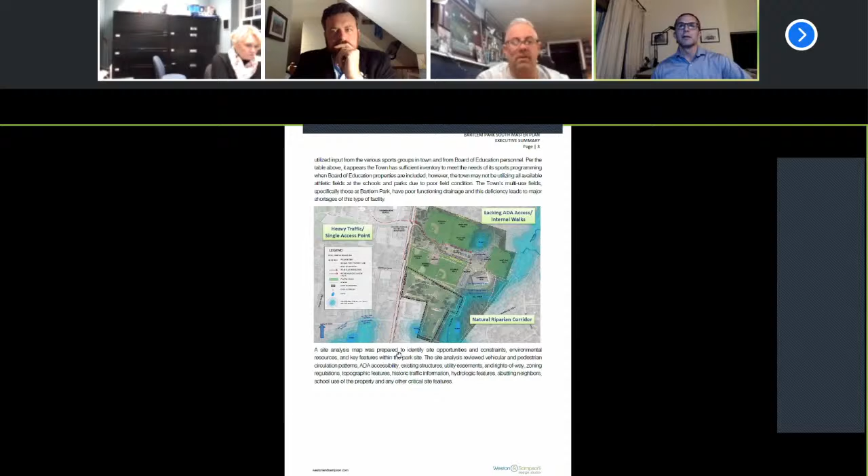Then looking directly at the site in a big picture, some of the things that influence the design: you have heavy traffic along Route 10, everybody knows about that, Cheshire High School right across the street, shared parking for Cheshire High School. There's a natural riparian corridor, or Mill River, along the east side of the property. Also surrounding neighborhoods, residential areas on really 270 degrees of the park, and some also on the west side of Route 10. And your ADA access, a big component of parks systems these days and municipal facilities, is making sure that you make it accessible for all, especially when we start introducing more opportunity for senior citizens, elderly, people that may have physical challenges to get around the site just like everyone else could.

So we started really engaging the public. The kickoff was the Cheshire Fall Festival in 2019. We set up a pop-up tent, had great attendance. You can see John there in action in the top right, speaking with a bunch of people, reviewing some of the potentials for the site.

We ran, this was a postcard we developed for that meeting, and we tried to collect as much data as we possibly can through a SurveyMonkey, which was available at that time. It was published online, sent out to multiple user groups. And this word cloud was a fun way to see what were the major key words coming out of that SurveyMonkey. You could see splash pad and trails and nature.

Some sports were in there, so everyone had that nature-based approach towards what they'd like to see. It was actually quite surprising. I thought I was going to get a huge contingency of athletic programs really speaking out for additional fields, but through personal interviews with stakeholders and collecting the data from 1,200 respondents from the town, it was important, but...

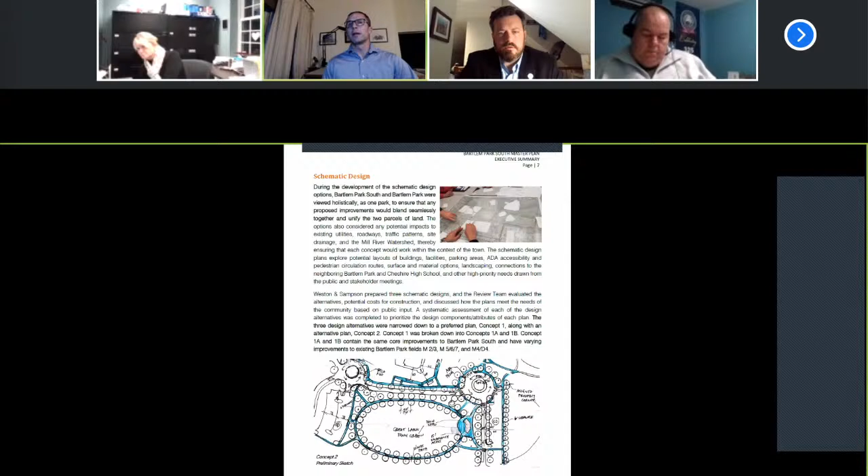One of the concepts, this was an early-on sketch, was the great lawn and town green right up front along Route 10. Have it a combined space and really have it front and center. We're proud to have this town green.

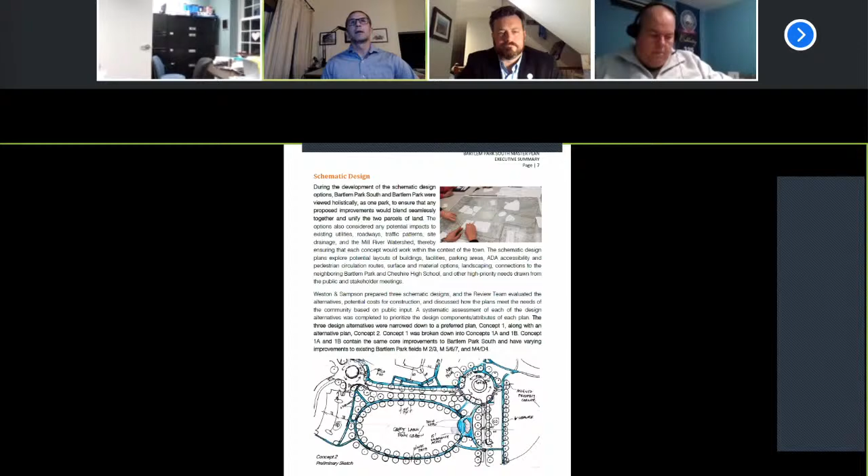After going through some more sketches and options, we didn't only put the pen to paper and look at trace, we also looked at costs of all these different things, which is very important at that very preliminary stage. We didn't want to design the Taj Mahal and have everyone excited about it and not be able to afford it.

So concept one is about core improvements. These are improvements to the Bartlem Park South parcel, which was the main focus of this master plan study. We took liberties to make sure it tied into the rest of the park and made sense.

Concept one, core improvements, really includes a smaller town green front and center along Route 10, and a larger outdoor great lawn that allows for passive recreation, unprogrammed space for everyday citizens to come, not organized sports.

You can have an event stage here that hosts a summer concert series, yoga classes, performing arts, really any outdoor class or outdoor venue, which increases the income potential for Parks and Rec as well.

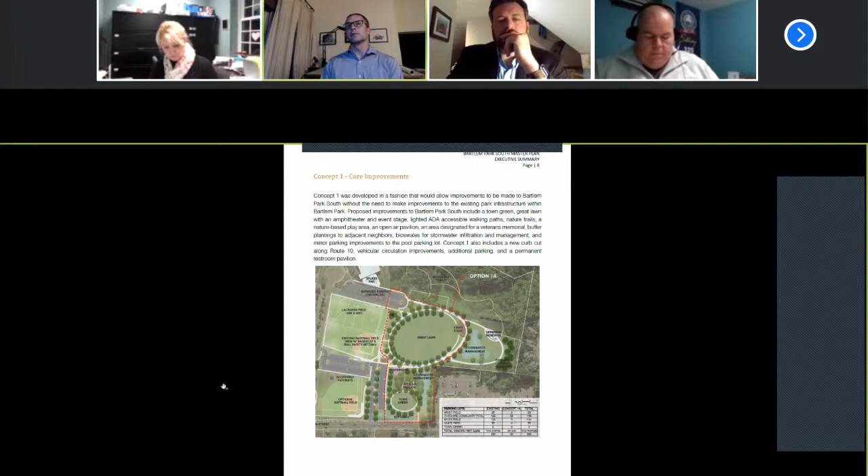You can see how close they are, so we provided some evergreen screening. The location of the event stage is also outward facing towards Route 10, so sound and noise was a consideration when we located this, as well as sun and topography, utilizing the existing grades out here to make everything work.

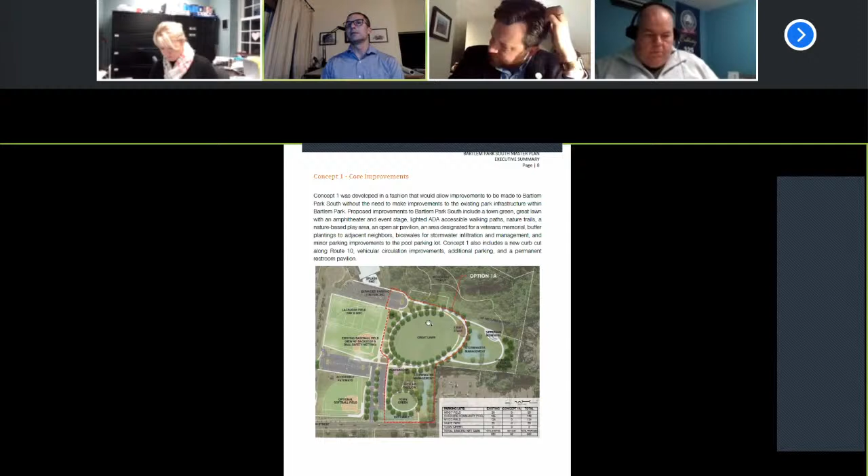This smaller town green—

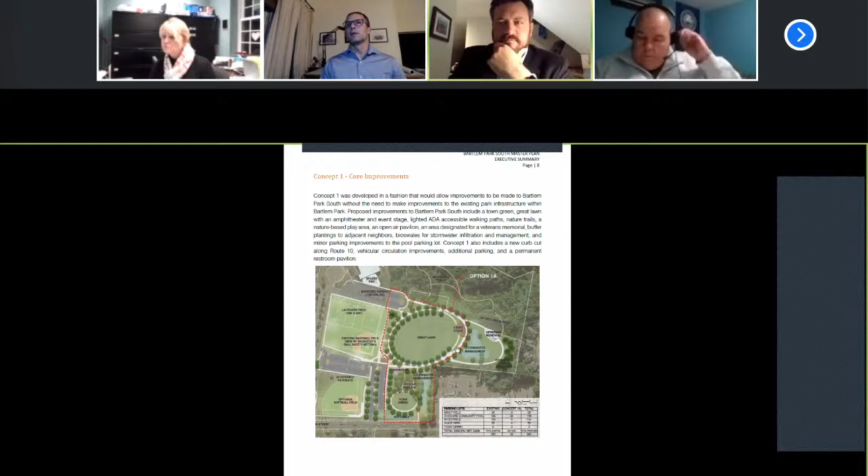Hey Ryan—just real quick, sorry, it's Sean. Would you be able to put on, I think one of your next slides, the larger map? Is it possible to see it a little easier for folks? Sure, let me zoom in. Yeah, let me do that. Might be easier because folks are watching on the TV. I'll just do these one by one since they're full slides. There we go. All right, perfect, thank you. Is that a little better? Yeah, that's good, thank you.

So here, the town green can hold a variety of different events. You could rent it out for parties, have tree lighting in here, and it would be graded out completely level, so if the weather was cooperative, you could have winter ice skating here as well.

There's a small playground area for a nature-based play program. The other important thing on this plan is all the white highlighted pathways, which are accessible pathways to all of your recreational facilities, including backstops, player bench areas, spectator viewing areas, etc.

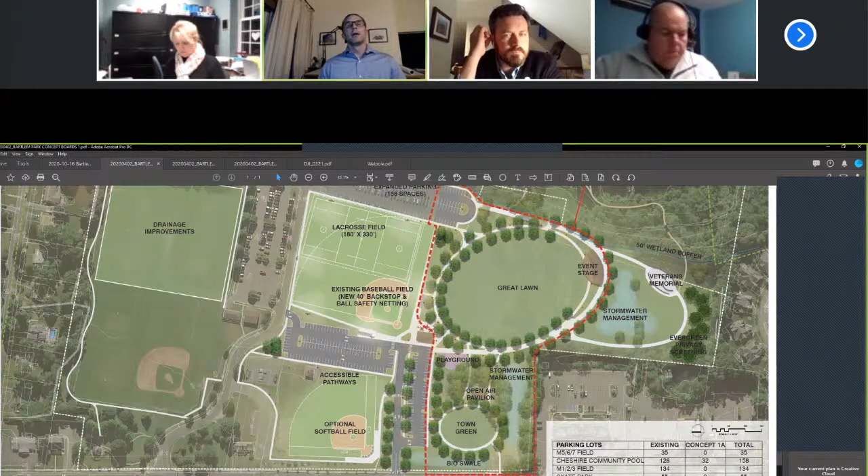In this particular concept 1A, zooming out to the bigger picture, a couple other key factors here were having this curb cut along Route 10, a secondary means of egress, as well as additional parking within the heart of the park.

We looked at whether to put parking out here, or expand parking in different areas. Really, putting parking in areas where they'll serve the new development, as well as divide up parking for the existing development—there's a small existing lot here and another smaller lot over here—so really the circulation frees up traffic a little bit and provides more parking.

Concept 1A: these three fields here, M2, M3, M4, and 5, 6, 7. M2, M3, and 5, 6, 7 are poor draining, which is a challenge for cancellations, for hosting practices, for early spring practices. It's really the worst time for scheduling, so we identified the need for drainage improvements here, as well as here.

There also seemed to be an appetite for fitting a multi-purpose synthetic turf field in town. Based on the square footage, we could fit a full-size football field, shown in back, with two overlapping lacrosse fields as they're striped today, in that area. It's lighted, and if we were to expand this use out here, it's not really expanding the use, but expanding the capability of use and the amount it could be used.

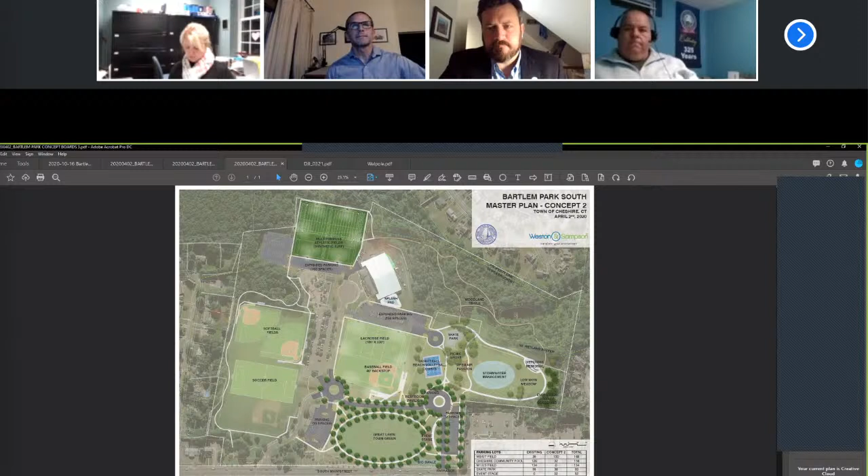Okay, excellent. Well, thank you very much, and thank you for these plans. I know there's a lot of different opportunities, and I like the idea of the town green, the great lawn, and the event stage. So I'll be interested to see how this plays out.

Thank you. May I ask a question? Yes, Mr. Slocum, of course. Thank you, Chairman.

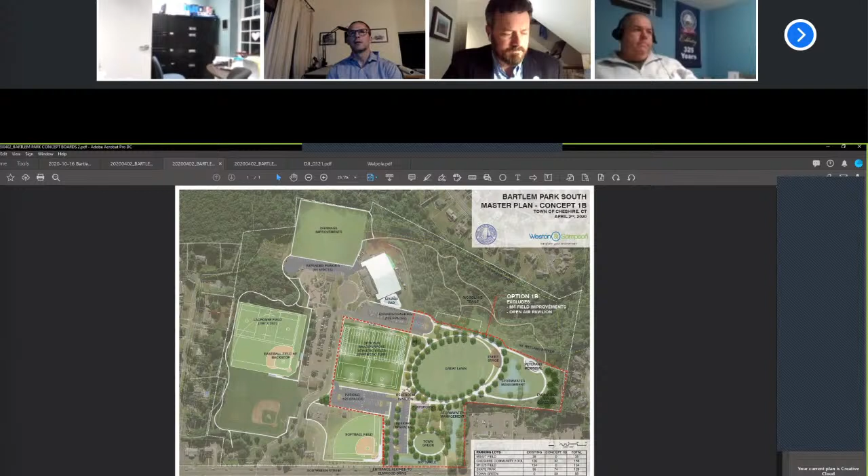I just would like to express my appreciation for the front lawn being proposed as the town green. I think that's an excellent idea. Most of us have played in our backyards, and we don't necessarily have softball fields right on Route 10. I'm not adverse to that, but I do like the concept of greening up the park. I think that's an excellent idea, and that may factor into cost. I can't judge the scale of it, but it appears to be larger than a football field.

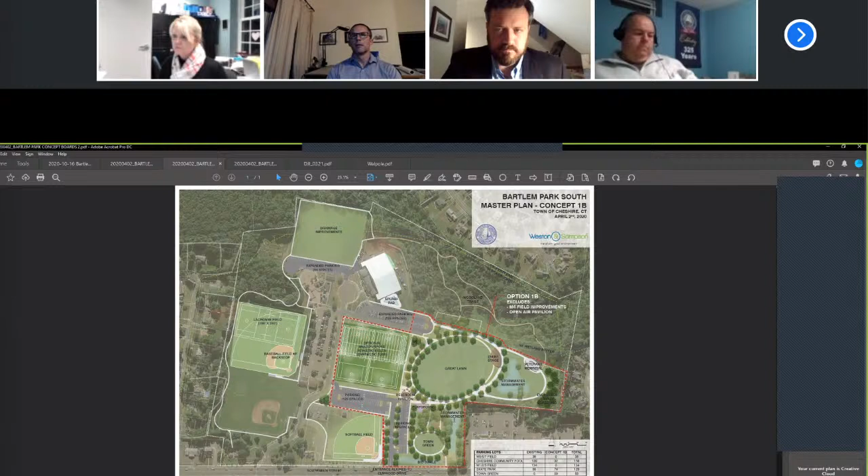How much space is that actually consuming of the acreage? The one that's say right on Route 10, the oval on Route 10. Yeah, which I prefer just visually. I like the whole idea of it. It's a grassy green area that you drive by, and it looks attractive.

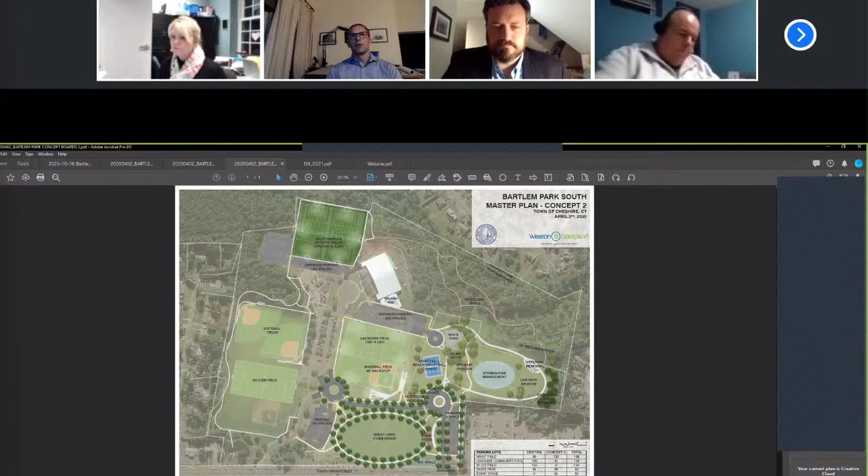Let's do a little fun exercise here. This lacrosse field can fit within this rectangle, and so that's about... Hey, can I interrupt you for a minute? I don't know if everyone else can see what you're pointing to. I can't see your cursor referencing things, so it's making it hard, at least for me, to follow where you are. Is there any way you can enlarge that?

Enlarge my pointer? Yeah, because you're referencing things that I just can't see. I don't know if anyone else is having that issue. You say over here, but I don't see what you're pointing to. Can you see the hand better? Yeah, try the hand. Can you see the hand? Yeah, barely, that looks better to me. Okay, thank you. I don't know how to change it from that. That's the best I could do right now, and I zoomed in a bit.

So if you look at the size of the lacrosse field up here, that fits within this area here. It'll be a tight pinch on the corners. Generally speaking, a full-size soccer, lacrosse, field hockey, or football field is a little under 100,000 square feet. So it's a sizable chunk of land.

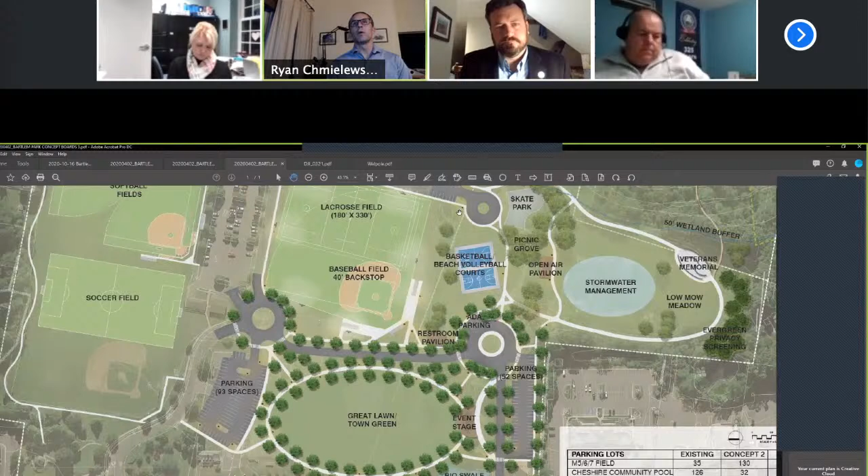Yes. Okay, I think one thing that at least a small number of people in town have appreciated is what Park and Public Works had done, placing some fields and footpaths in that new area, and they are used. Has this more or less kept about the same amount of pathways in that area, or has it even enhanced them some? I think it has enhanced them to some degree. You could actually see some of them, they're hard to see, but there's white dashed lines in the backdrop. So I would say reconfigured, added. In this particular area, it's probably equal.

But Tim, if I could just jump in there, that was something that was a source of a lot of conversation and feedback we heard from the public. Just to your point, people really appreciated the ability to walk there. One thing we heard a lot was an alternative, in a way, to our wonderful hike and bike path right in the middle of town. There are some walkers who feel it'd be nice to have a non-bicycle space, more for walking, where you don't have to worry as much about folks riding their bike at a faster speed.

We've heard that feedback from folks, and it was important to find a way to loop around all of Bartlem, not only to attach the Chapman parcel to the overall park, but as an option for whatever that is, 1.6 or 2 mile loop around the park, if possible. That may be at a later phase as we talk about the master plan. But that was the feedback we heard a lot, that people are looking for a place to walk in a more park-like setting, without concern about high-speed cyclists coming through. So just echoing what you said.

And then my final question is this: with respect to creating a town green, so to speak, I just don't recall what you said in all your planning. Did you give up any fields? Was there a sacrificial field that's not there?

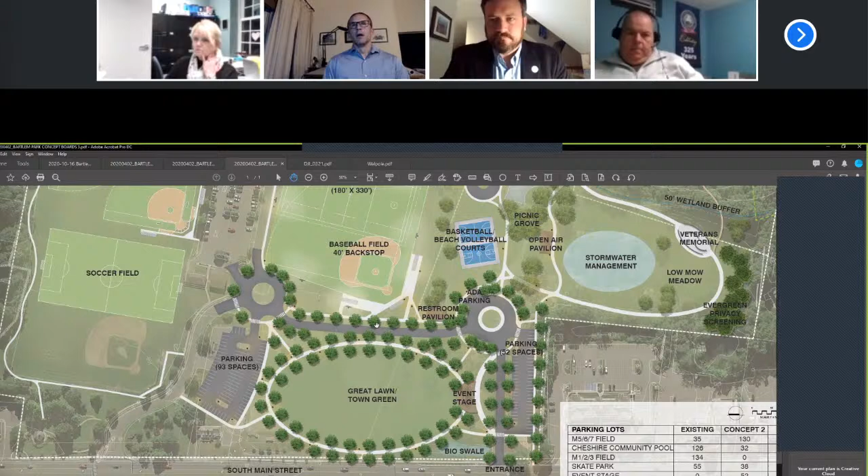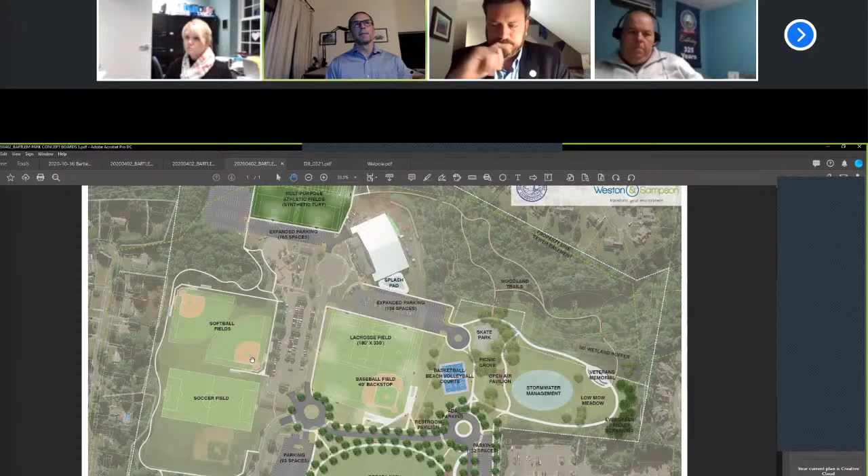In this plan, we have, I would say, sacrificed a rectangle field by displacing the softball fields over here. However, that's one of the reasons why the synthetic turf came into play, because you could run that multi-purpose, as long as you're allowed to by town code, how late you could light it, and by people's ability to play after school and on the weekends.

Okay, thank you. Right. Sometimes of the year you can sort of double your usage of a field with lights, because you're playing after 5:30, until you can't play.

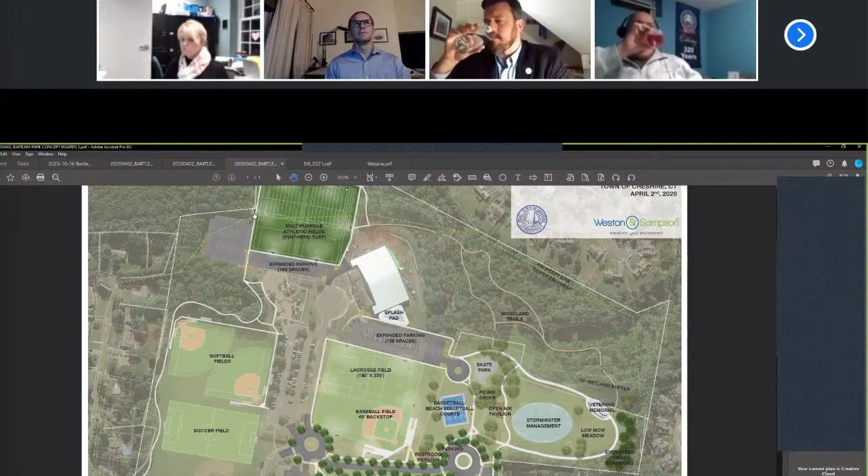I can't see everybody, so I thought I saw Miss Nichols. Yeah, I do have a question. First of all, John, I communicated this to you before, and I will say it publicly: I'm very impressed with the fact that you've listened to all the community input and really tried to incorporate the ideas in any one of these plans that you have proposed.

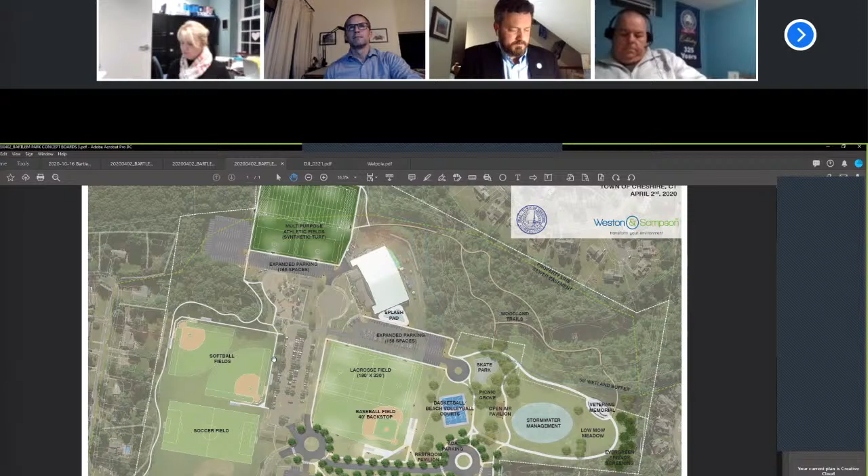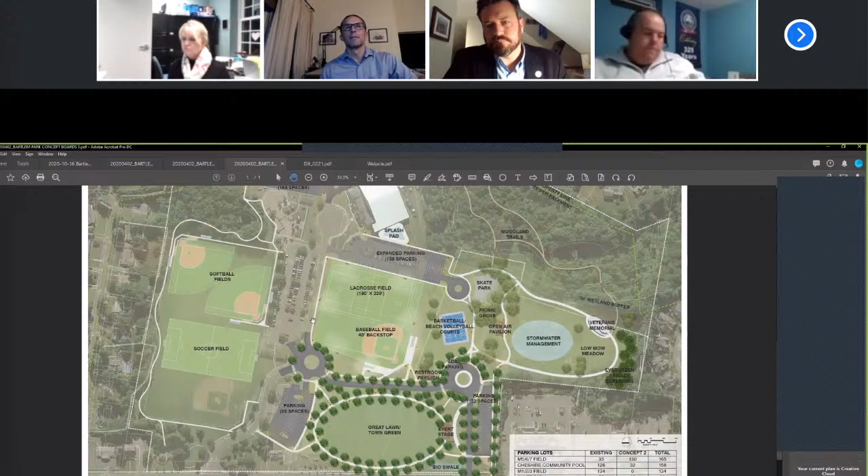There's a couple of questions that I have in this particular plan. I feel like there seems to be an awful lot of driveway space to go around these little turnaround places, and I'm wondering if that is taking away parking spaces, which I think are always at a premium in any kind of a plan like this. So does that eliminate parking places and provide much more impervious surface to this park?

It's hard to tell the proportion when you're just looking at the picture. It seems, Ryan, like you want to go through that chart? Sure. On this one, any parking space that we lost in this area by having the circulation through, we've gained by reconfiguring here. So we've added a few spaces here. Here we've added 52.

So if you look at this concept too, what's existing, let's just go from the top down to make it easy to follow. Existing for M567, that's all the way up here, we have 35 spaces right now. We're showing concept 2 has 130 spaces. Cheshire Community Pool parking here, existing is 126. We're adding 32.

The M123 field, that's this parking lot here. We have no change. And then the skate park, that's this parking area. We had 55 existing, we're adding 38, for a total of 93.

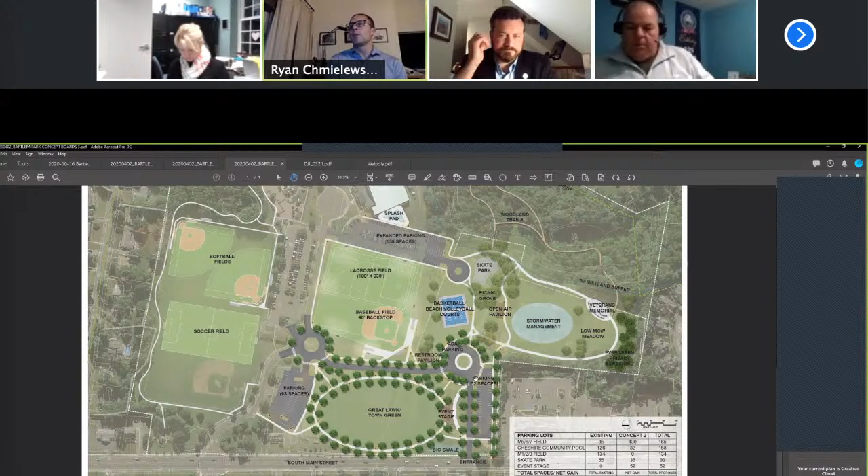So that does become a questionable use, not necessarily a potential place where we could build something else. It's going to have to be reserved entirely. And what you see a lot, oftentimes that is overlooked.

It's one of those unfortunate things, you have to dedicate an area for stormwater. But this area here is already so natural, it's already a low point. We could really make it, if you do the right planting mix in there, look like a meadow versus being an engineered stormwater management system.

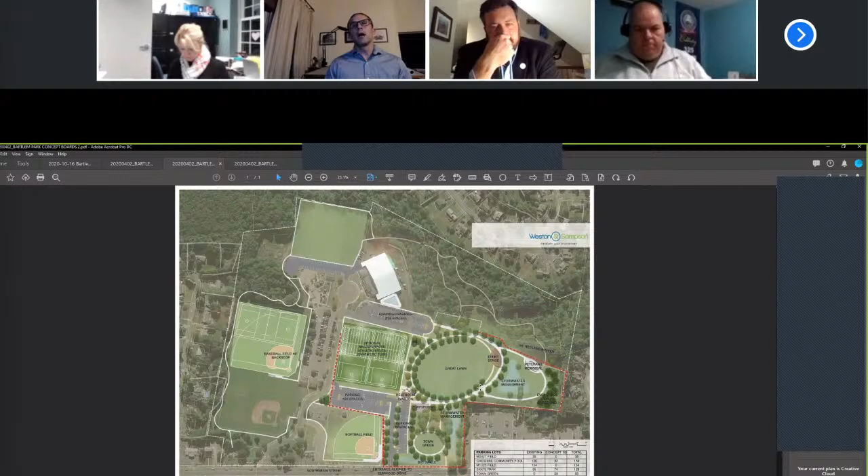Okay, and I don't remember the first two, where we managed all the stormwater. This seems like this would manage more water than the first two, but I can't remember where you had those. Actually, it probably manages the same, if not more. We've just divided up. We've divided and conquered.

Divide and conquer is probably a more desirable approach in that you have more chance for water infiltration and better water quality, versus just having everything hurry to one spot where you're raising up and then slowly settling. Here, if you design it correctly, you do have potentially better stormwater quality.

And those are going to drain the property so that we don't have the water problems on the fields, if it's laid out properly. Correct. Those are really for the increase in impervious surface and the sidewalks. It's not, the parking lots are the biggest increase in impervious area, and additional roads. The walkways have some impact at the event stage, but

the field drainage itself is a little different of an animal, it's its own issue. These fields here are more about soil compaction and subsurface conditions versus water running onto the fields causing a problem, as well as based on the soil types. In soil conditions below, they really should be either graded with a higher percentage slope, but then that becomes less desirable for athletic field play. So it's a give and take no matter what.

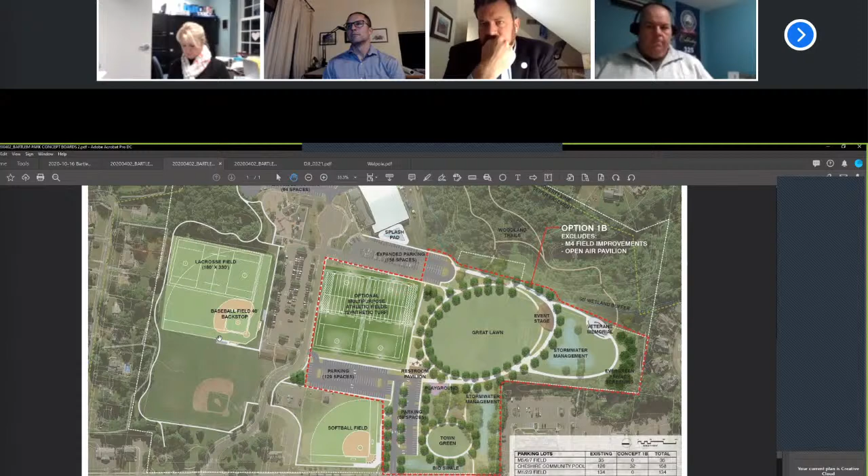And the only thing that concerns me slightly about that is that we are in a school modernization mode, and we are right now looking at the uses of the properties where the schools are. Should we need to use some of those fields to expand any parts of the buildings, is there flexibility in this, in any of the plans we're considering here, to be able to include those fields that we would otherwise have moved from Bartlem Park to go to, say, Highland School?

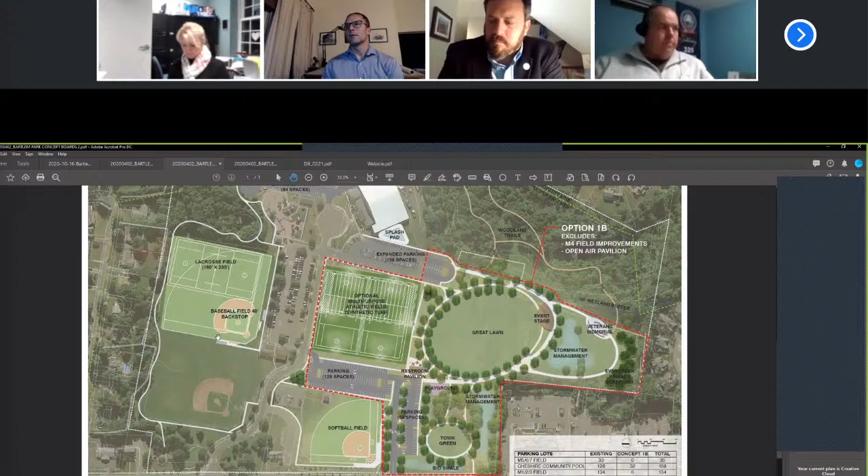Supposing we had to make an addition on Highland School and we had to give up those fields at Highland School, is there enough other place to have fields in town? Because these projects are going to be somewhat concurrent on a time frame, and I wouldn't want to accept this proposal based on something that might change when the school modernization proposal came along. On the other hand, we can't wait for the completion of every project, but we need to be flexible, I guess is where I'm at.

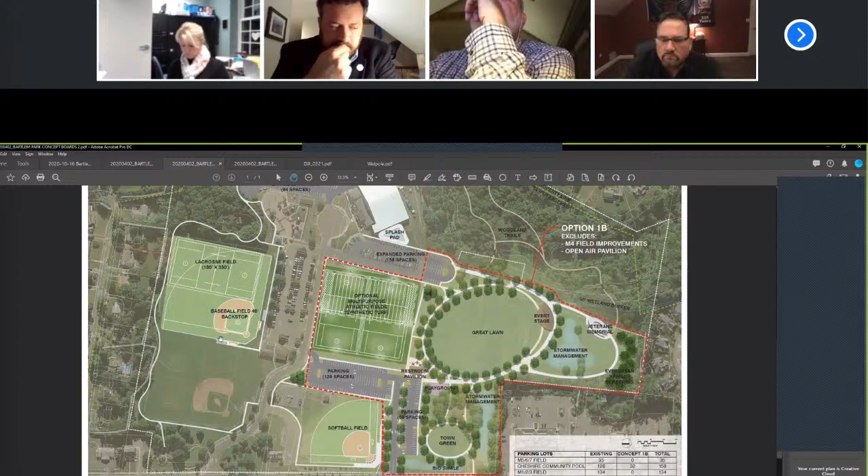So I'm going through a town-wide athletic field master plan in Greenwich right now, and they have a lot of fields, but they also have some issues going on at their schools with the need for remediation of some of the sports fields. And their programming is very tight in town, and they literally have to shut down probably 2, 3, 4, potentially 4 fields.

So where's the swing space? Yeah, so as part of that townwide study, we've identified several parcels that may have a bit of extra real estate, or if you mix and match and reconfigure, it will work and you'll still be able to support your robust sports program. Then in the long term, you make those improvements in the short term to support your current program, but in the long term it provides park and rec and the schools greater flexibility of scheduling and less wear and tear on your fields, which also reduces some of the maintenance and replacement and long-term expenditures for these fields.

Good, so that's a consideration we need to consider when we're doing modernization as well. It's just a potential work-together spot. Yeah, and one of the biggest things to help out with that is a synthetic turf field, because you can really run the heck out of that field without any detriment to the conditions below your feet in any weather at any time. So for scheduling and dependability of scheduling, losing some fields for the interim, putting in an additional synthetic turf field makes a lot of sense.

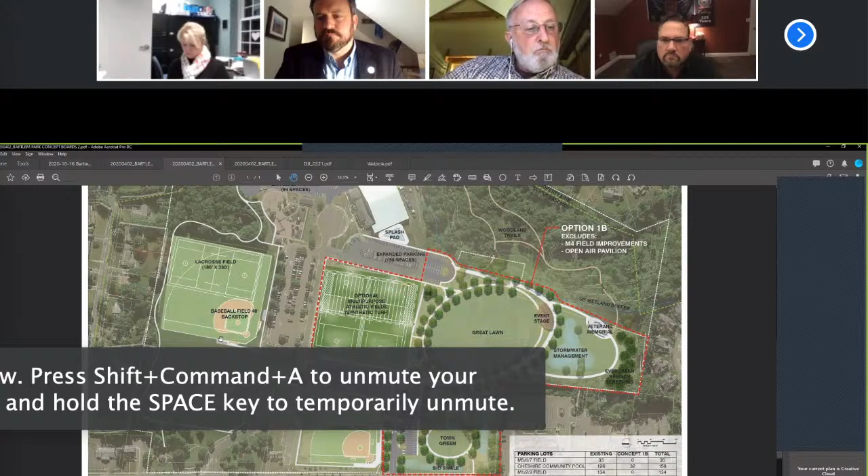Okay, I think that for the moment answers my questions. I had the same tennis court question. But to me, any one of these proposals has addressed most of the concerns that I've heard from residents. I like the town green concept. I think it boils down to dollars and it boils down to input from the rest of the town. I appreciate the work because you really worked hard to be thoughtful about how to manage the space.

Sure, just one consideration between the town green concept on the Great Lawn up front versus the first two concepts. This was really driven by having more intimate events and being able to have that smaller - it's still sizable, but smaller - space in a Great Lawn event area, whereas if you were trying to host a personal event or a more intimate event, it would almost get lost in the sheer size of that Great Lawn. So that's one advantage that this plan has over the other.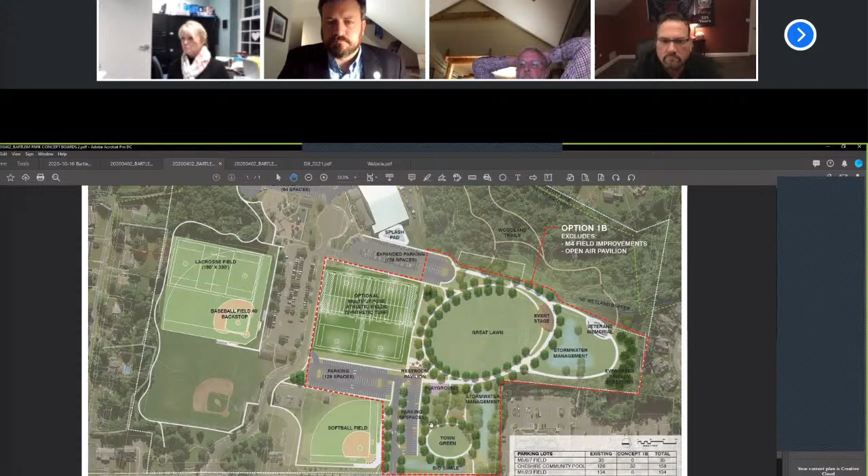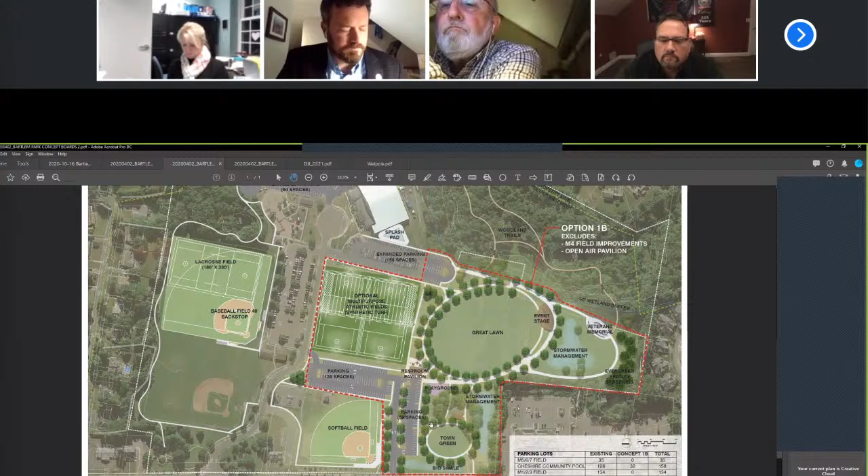I happen to prefer that. I felt it was more small town, but I can see Tim's point about having it be visible. I like that on this one we're looking at now, that you've considered the residents with the stage facing north or northwest, so that the sound will not be as impactful to them. And I like this plan because you put the turf field in the center of the park where it's less impactful for the neighbors, and you still have room for the community gardens. So for me, there's some potential there. But either way, it's a good beginning, and I think it's reflective of a lot of positive input. So kudos, job well done.

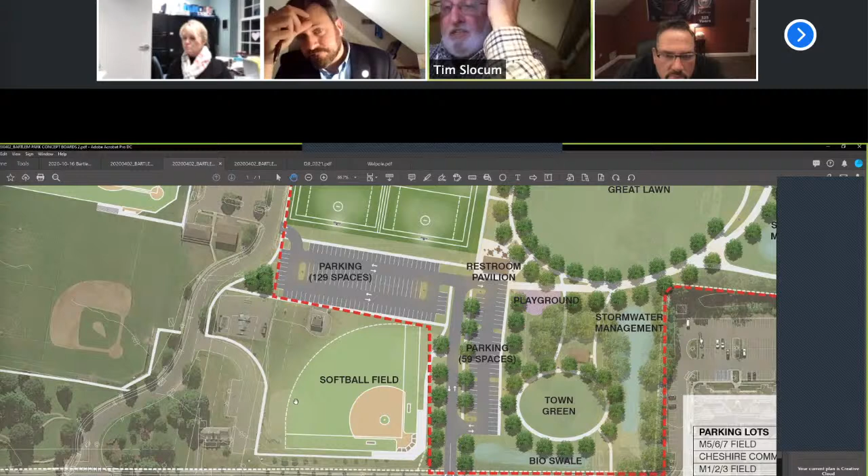Thanks. Because this closely relates to Sylvia's question - the softball field that's adjacent to the smaller town green, there's not a field there now, am I correct on that? There is a field there now. Okay, so that's no closer than the current field we see driving by. Correct, if you look you can actually see the ghost of it underneath. Oh okay, here, fine, okay. That helps me. I'm just trying to gain some perspective on it because that seems so close to Route 10. But okay, thank you.

Related to that, if I could - Councilor John Walsh asks - doesn't that mean that we're losing that field if we put the Great Lawn right up on Route 10? Because I don't see it someplace else on the maps.

On the other concept, yes. We lose two fields facing each other, and we're shifting them over to where M4 or 5 is, and we lose M2 and 3, and we lose probably one rectangle field. So by putting the Great Lawn a little further away and having the town green right up against Route 10, we don't lose any fields. We actually keep the same or maybe gain some depending on how you reconfigure it, and we have the Great Lawn just a little further away from Route 10.

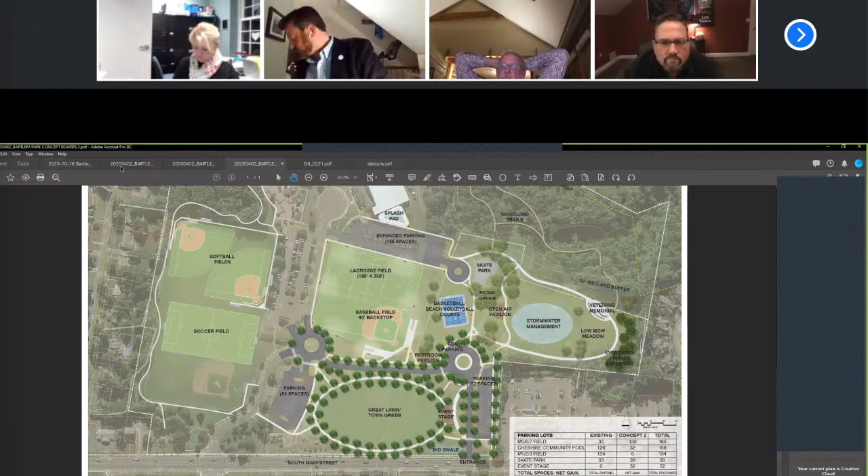That's correct. Thank you.

Thank you. First, kudos to the designs, I think they all capture some great ideas. I do want to make one point though. It would be great to have a town green, because although many people think the town green in the center of town is our town green, it's actually the First Congregational Church green, and they've been very nice to allow many groups and organizations to use that green. But I think it'd be nice to have something for our town, and I think it's great.

Can you go over lighting? I know you're talking about lighting. Where will there be any new lighting? And my concern also is, on either concept where the Great Lawn is, if they're having fireworks or something and people are there in the evening, what kind of lighting will be available?

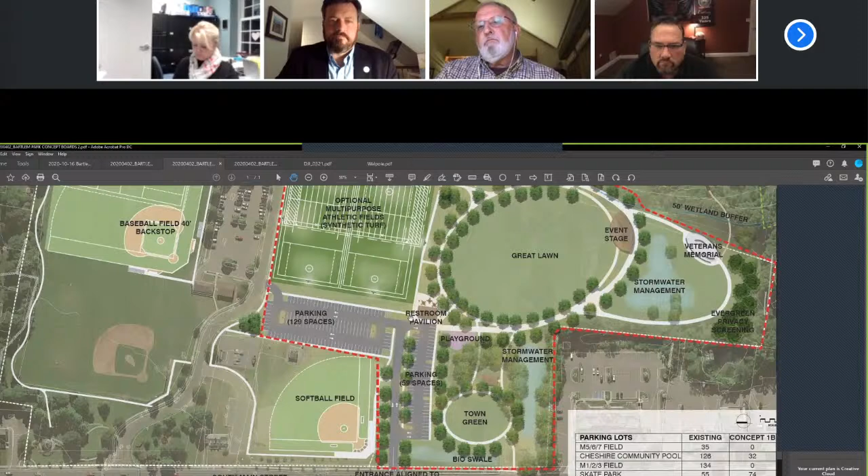Yes, that's a great question. I'll zoom way in here because we didn't really highlight them, but they have been accounted for. There's all these little gray dots along the pathways. So there would be pedestrian and parking lot lighting throughout, so people can safely come in and out of events as necessary.

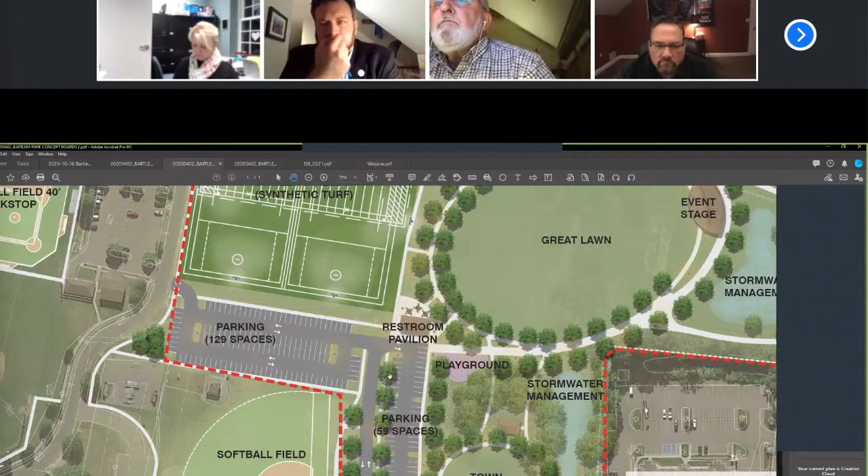And on concept 1A and 1B, the skateboard park is staying in the same place, correct? Correct. And in concept 2, it's going to be moved, right? Well, I mean, because I know we just spent some money rehabbing that, I'm assuming we'll just move that equipment. Am I correct on that? They're just bolted down, yeah. I believe they're relatively... again, I'm not sure if in this proposal you could do an all new one certainly for a little more money, but I believe, correct me if I'm wrong John or Ryan, they can also be moved and repurposed in a different area if needed.

That's correct. Okay, and around on both concepts, those are trees planted on both sides of it? Those aren't bushes, those are trees, correct? Trees, correct. So when I look at this, say there's an event going on, did you think about putting a crosswalk through the middle of it? Or the other thing is, if there's an event, is it handicap accessible for people who want to see it? Because all I see is grass, and I don't see a place where those with disabilities could get in there if they want to be part of the event.

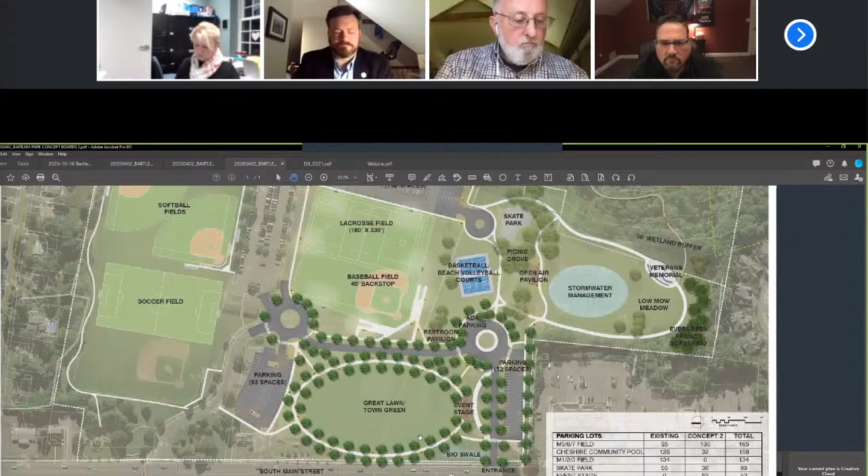Right, so that's another good question. We looked at the programming of the space, and the answer to 'are there crossing paths here' - originally I showed some concepts with that, and it would look like a quadrangle versus an open lawn space. But I would default to building the perimeter and then just monitor it over time to see if there are any desire lines from people walking, if they're taking certain paths to get from this side of town, cutting across the green and it wears out. Then you install pathways.

Yeah, but I'm also concerned about somebody in a wheelchair - if there's a concert going on and they want to watch it with all the trees and everything, would they have to sit on a pathway where people are walking by? Is there going to be a place where they can go instead?

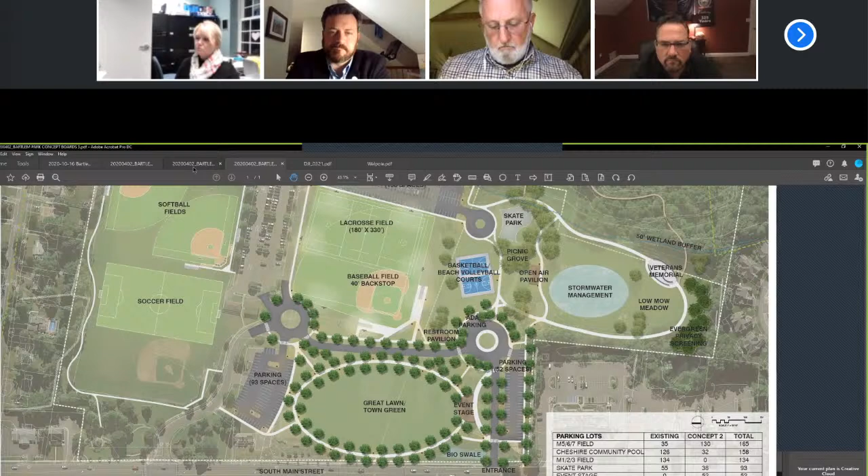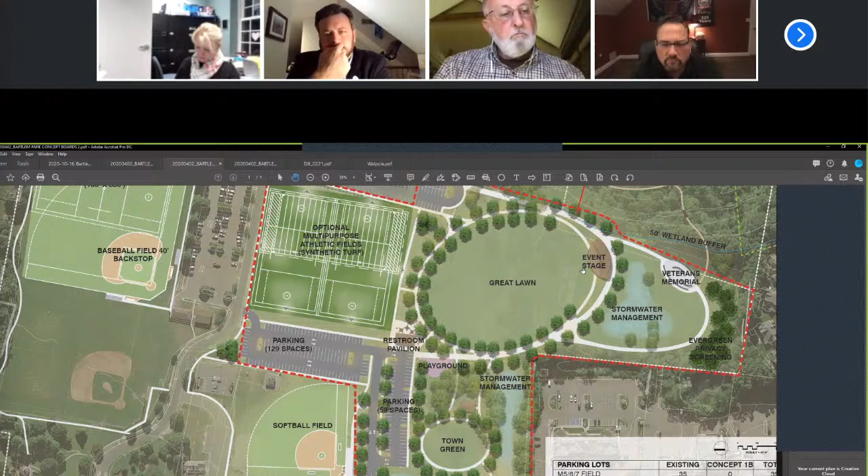Yes. So along the front - let me see if the other one shows it - this one shows accessing this event stage, comprised of a backdrop and a stage up here. And then this area in front is a hard surface where you'd set up chairs and have an accessible area. If we need to expand that a little bit, depending on final sizing and configuration, we would do that, but the intent is to have a larger flat area in front for accessibility.

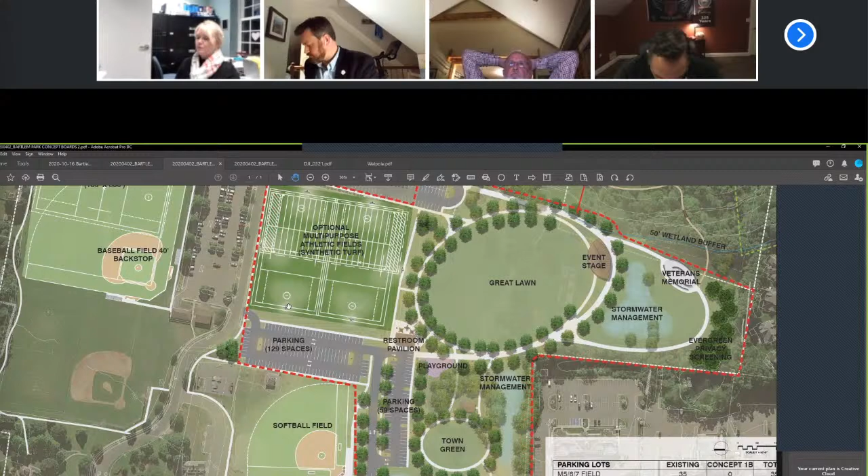And if you want to, as a fundraiser for certain events, have rented chair spaces or private seating areas up front. Yeah, I mean it's important that we do have some area for people with disabilities to have a place to sit and enjoy the concerts or whatever is going on.

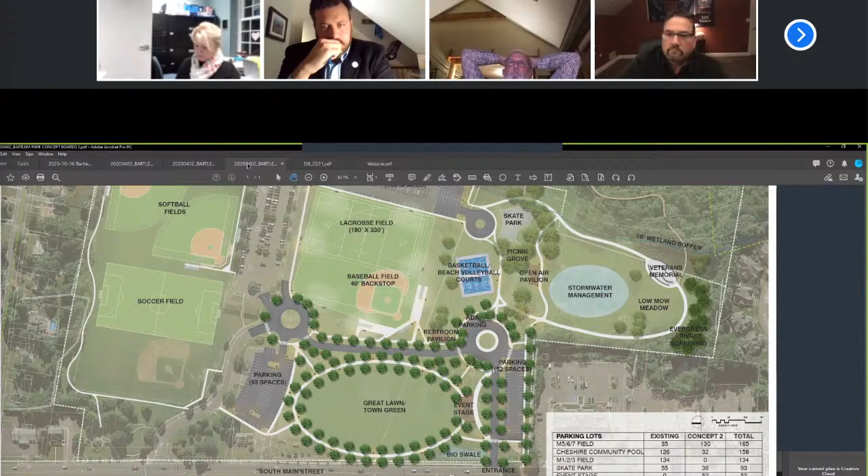The other thing is, when I was saying lights - are we planning on lighting any more of the fields, or is it just the back field that will be lit?

In this particular one, we show field lighting on field M4 in the baseball field. So we do show lighting there, and we show lighting on this synthetic turf field as well.

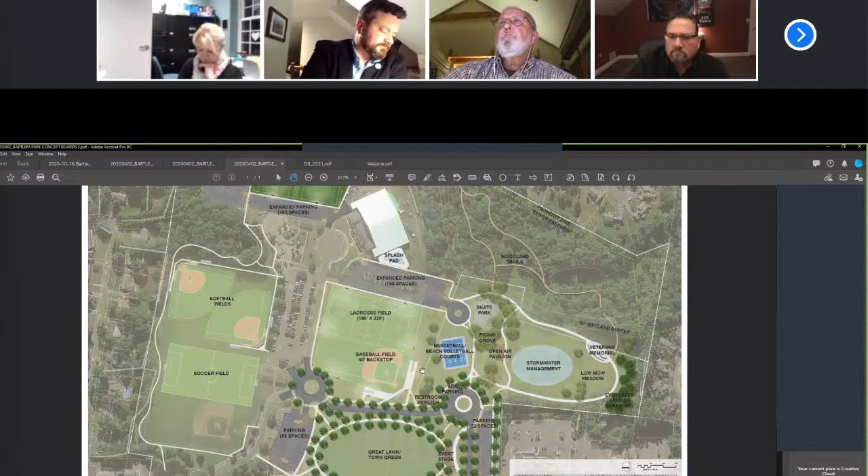Okay, it's a great concept, and I'm sure when we start looking at the costs, that will drive how we go anyway. But I appreciate it, thank you.

Sure, other questions? Mr. Talbot? Thank you, Mr. Chair. If you could bring up, I believe it's 1B.

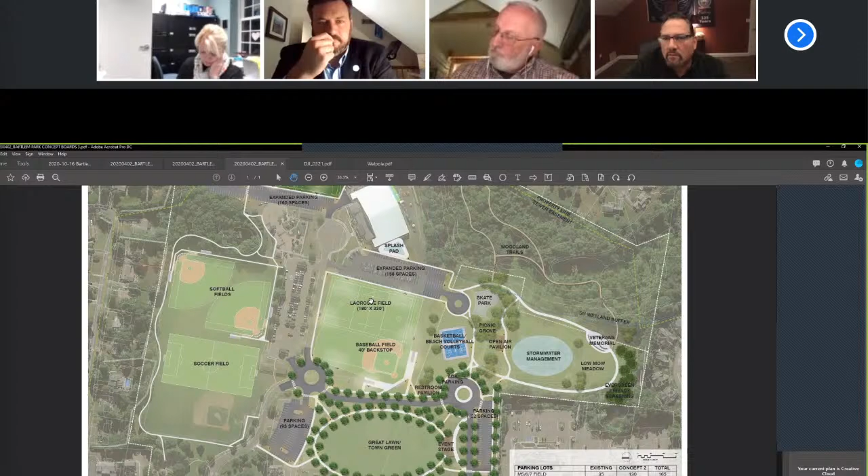So a couple things, John, first question to you. This one shows that you're going from 3 softball fields down to 1. Is there any concern with the amount of tournaments held on those fields, that you won't be able to have that volume of play in that small area anymore?

No, Peter, we're only losing 1 softball field there, because we're moving the hardball field. The 90-foot larger baseball fields are at a premium in town, especially with not getting a lot of use of the high school one. So we just moved that over to the left, on the other side of that big parking lot. We're just losing the 1 softball field where it says Town Green.

Right, you're losing that one there. And that was only because we had the inventory on the school side. We still need more public softball fields to handle the volume of activities and organizations that Cheshire has currently. But identifying space that the town already owns at school facilities, like I said earlier, with some TLC and some minor fence work, you can make that work.

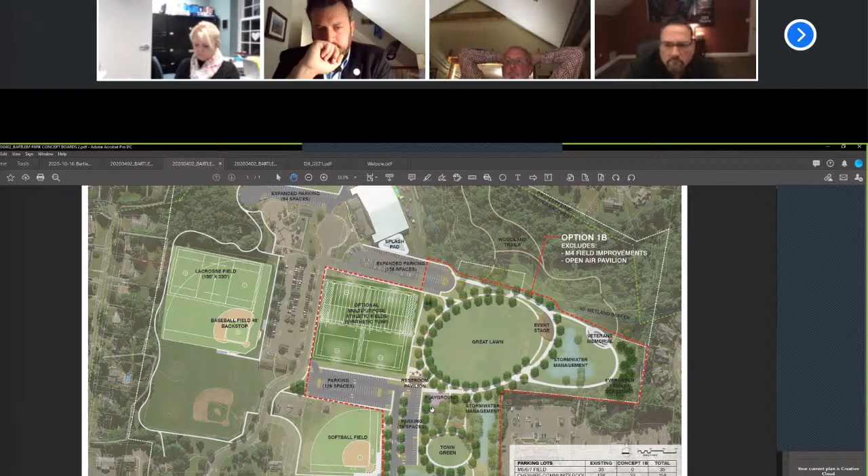We could consider that horseshoe shape. I think if you plant species that have that upright, arching vase shape, when you're looking in, you still can see into the space, and it won't necessarily be a line of trees blocking your view into that town green. And then what it does is when you're on the town green, it really makes you comforted by that circle of trees. It makes it more intimate of a space. And also, because of its proximity to Route 10, it gives that separation from the fast-moving traffic. So there's both sides of the story, and that's something that's easily figured out in the next stage.

The Great Lawn area, am I correct in believing that the grading of that area would have the left-hand side, where the circle of trees are, higher than where the stage is? That is correct. In looking at the grades, there's actually, where M4 is right now, there's a little raise in grade. It's a quick rise up here, and this is the natural high spot.

That's another reason why we located it where it was. And then it slowly dies off. We'd have to do some regrading here, and then eventually, as you get towards the end, you would dip it, make it grade off at an even steeper percentage. So if you do have those smaller events, you can stack people up and still see over each other.

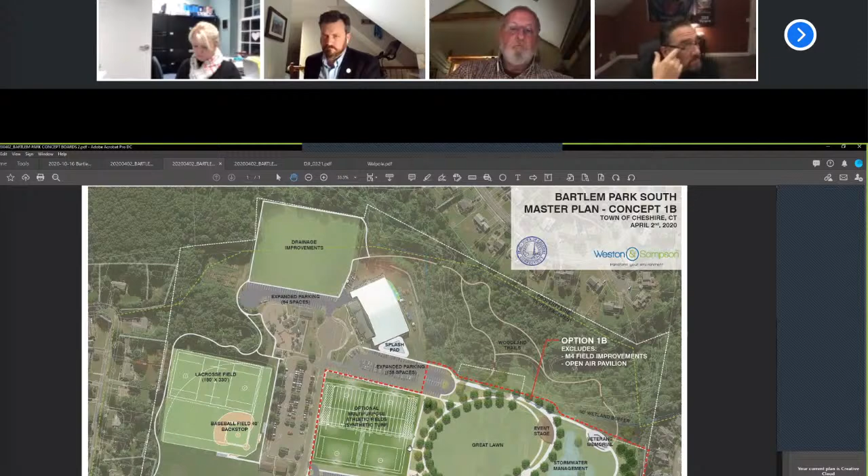That question and concern was raised, and I would say if you had fireworks, I don't know where they'd be launched from. I honestly don't. But you could launch in a fashion where there would be no chance of those adversely affecting the turf.

Thank you very much for the work that you put in, and as other members have said, for taking into such great consideration the input from the citizens. We appreciate that. Thank you, Mr. Chair. Thank you, Mr. Talbot.

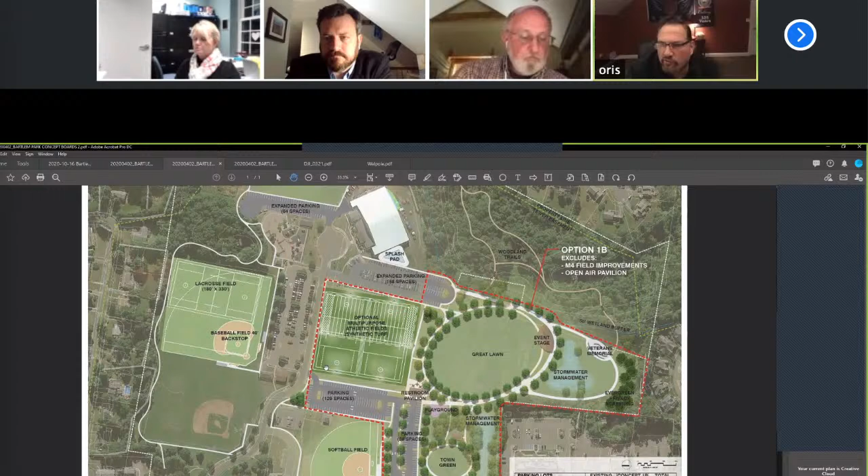Mr. Jinks, I think I saw your hand. Yeah, thank you, Mr. Chairman. So there's a lot to be excited about here. Thank you very much for presenting these to us tonight.

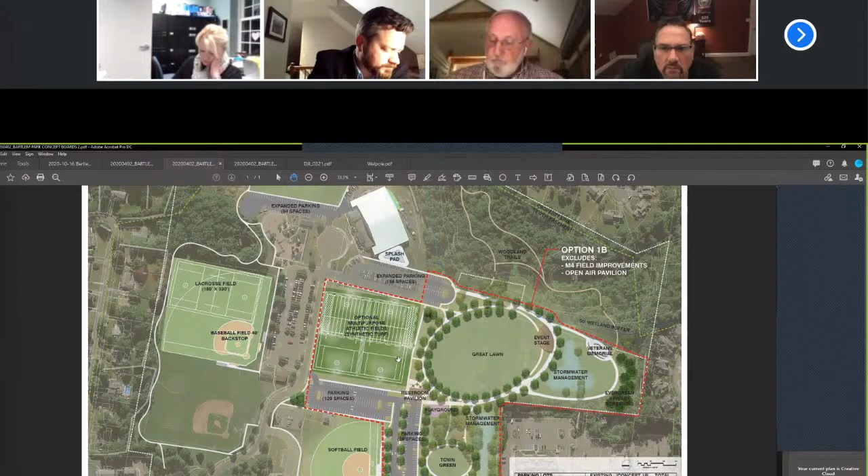Just a couple quick questions I have is, and sorry if you might have gone over this earlier, about where it says drainage improvements. What happens to that space in those plans? This space here, M567 - there's two plans that have space for drainage improvements.

In any of the spaces, the right approach is to dig some test pits, take soil samples, send them off to the lab, either amend the soils or come in with new soils, put a gravel blanket in if it's a groundwater issue, put field under drainage in, irrigation, and really get more of a sand dominant field so it does drain better and perform better. But then with these plans, those fields are just left to be open.

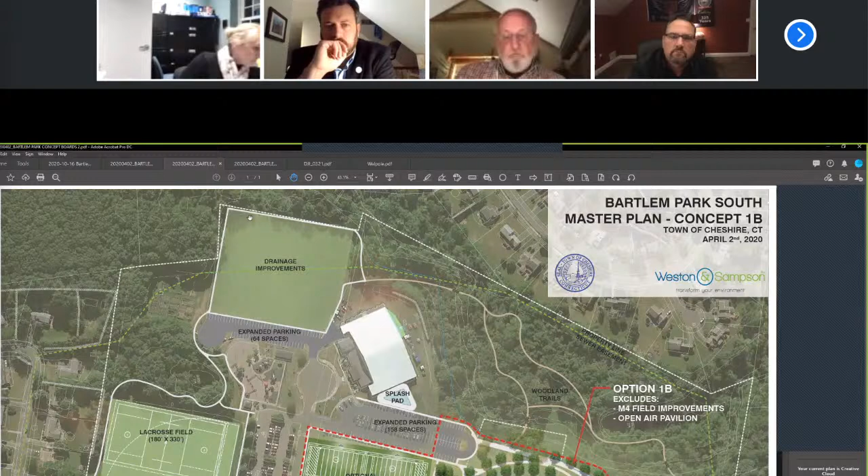Is that the idea? Right. Well, right now they're existing - you could see very faintly below the striping for lacrosse right now. So they would be left same program. We would just improve the quality so they could be utilized more. Okay, I understand.

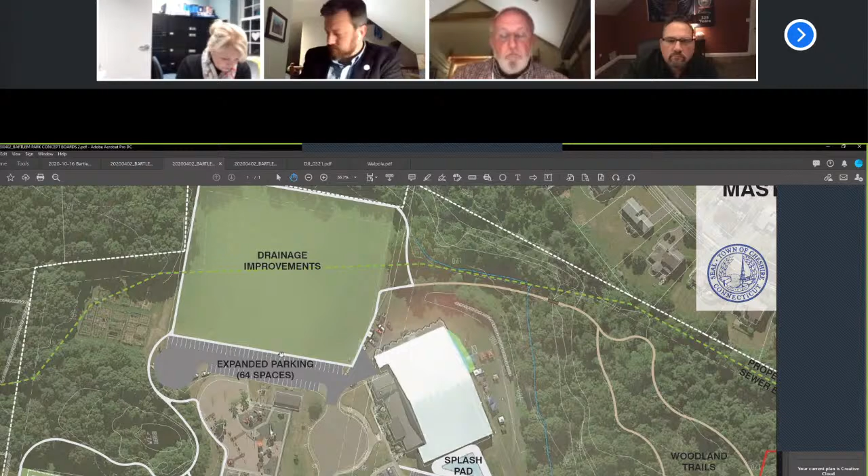It seems like concept 2, like we're getting maybe more out of the space. Would you describe it that way? The concept 2 is maybe we're getting potentially more use of the existing space with the number of ball fields available?

I don't know if it's more use. I would classify it as - you would actually lose a rectangle field, which, that's not a great thing because the popularity of rectangle sports are increasing as opposed to the diamond sports.

So more use. However, though, with the field being lit, those two fields in the back - for this particular concept, with scheduling and being able to go to at least say 9:30, 10 o'clock, you could through scheduling accommodate that field loss.

Right, with the field lights, you could account for that. Correct. And then to that fact of having two lighted fields, yeah, you would get more use out of this park. But there's nothing to say that you couldn't light two sets of fields on this one either. Right. Okay.

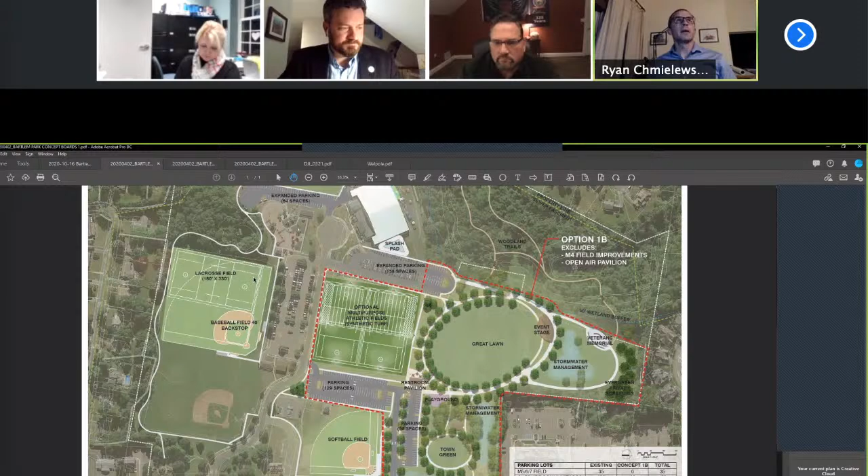Sure, so those are great questions, and we'll start from concept 1A. On each of these plans, 1A and 1B, we've identified the phase line in red, and then itemized in the cost estimate what's included in that portion. The major advantage of concept 1A or B is that you can not do anything to the rest of the park, but make the improvements to Bartlem Park South, and that's what that initial cost estimate was.

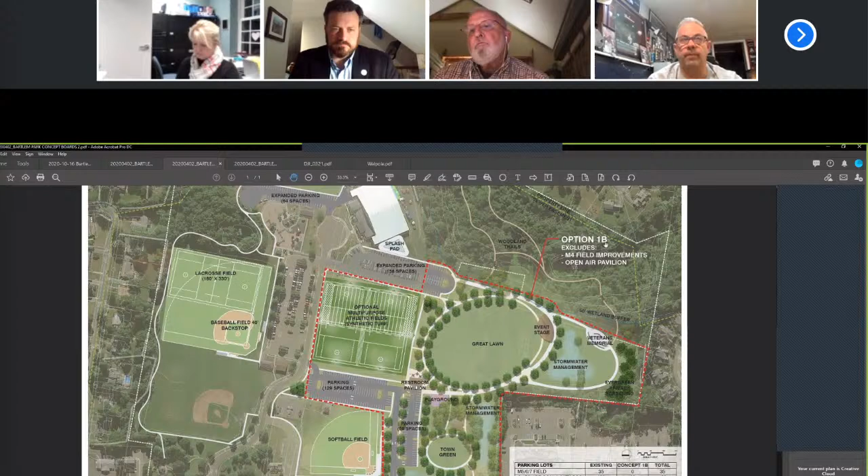In making these improvements, it would be very advantageous to have an additional curb cut and additional parking in this site. That's where 1B came into play, we added that parking within here, and we have optional improvements here should there be an appetite for it in town. But option 1B excludes M4 field improvements and an open air pavilion down in front by the town green.

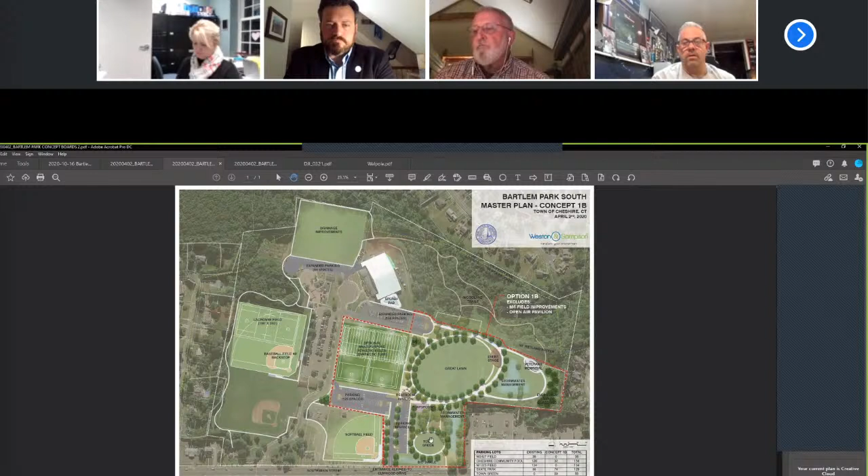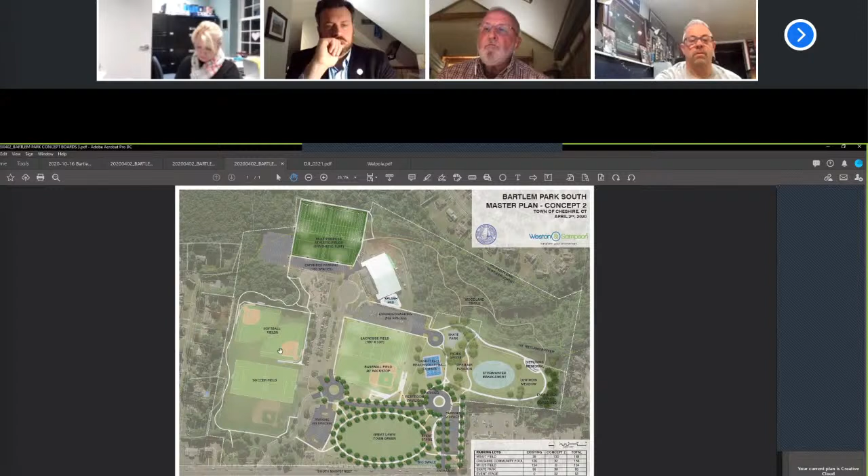And then a lot of these other improvements really is long-term capital planning. They're not necessary for the implementation of option 1A or 1B, they're just long-term capital expenditures that would be very useful and beneficial to the community. Option 2 is a little bit different in that, because you're disrupting 2 of the fields up front, that's a major loss, you would want to replace those. That would trigger the need to displace at least 1 of the 2 fields here.

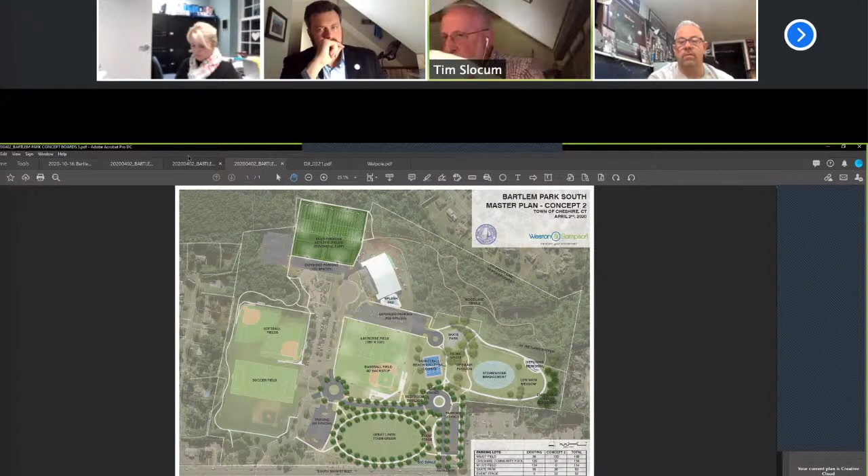So that's the jump to 6.3 million. Right, so you're basically sitting on 2.3 and you go to 6 point something if you have the town green on the center essentially, and we replace fields. Let me get to those so we're all on the same page.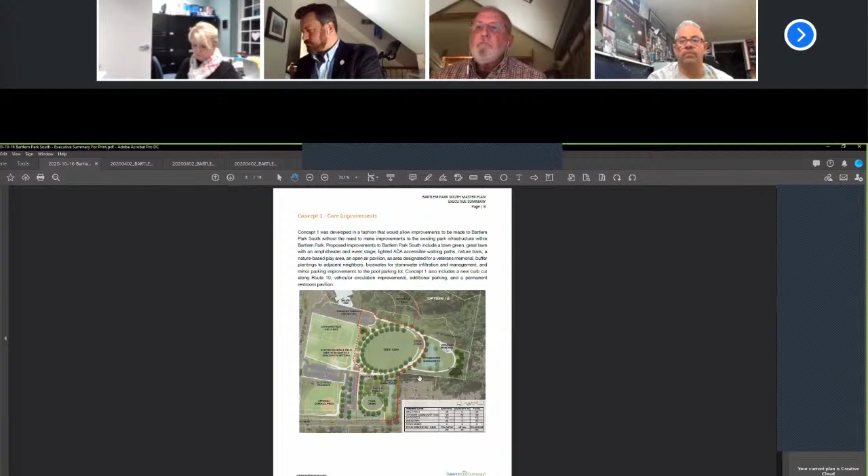So option 1A, I'll walk through, is the town green. That's tree planting, lawn and lighting with circulation paths. The great lawn is tree planting, lawn, walkways and lighting. That's really it. There's some stormwater management, erosion control, and site preparation that needs to happen.

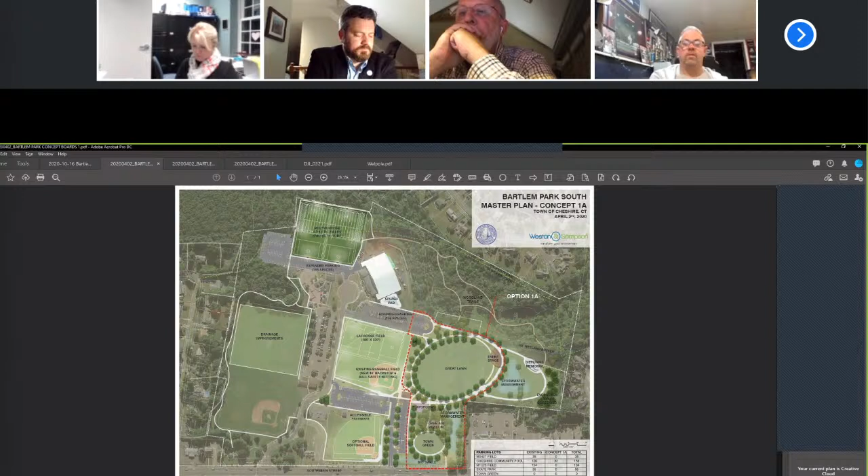So option 1A at 2.3 million is to do all the grading and walkway system within here, the tree plantings, and the lighting of those walkways. So it does not include expanded parking or any of this roadway infrastructure. Option 1B, if we look here, that phase line changes and includes this roadway infrastructure and some other additional options. So let's go to the cost on that.

So option 1B includes the town green as discussed before, includes the Great Lawn area as discussed before. It includes putting in the outdoor entertainment venue, the band shell. It includes a restroom pavilion. It includes the town green and skate park parking and access drive. It includes M1 field lighting, and it includes the memorial walkway and bioretention areas.

So to go back to that, it includes lighting around this field, not synthetic turf, but just lighting, all of this parking and circulation, and the memorial walkway and infiltration areas. At a $6 million price tag.

And then option 2, let's get to the cost now. Option 2 was the full build out of concept 2, and that was 14.2 million. Which included a synthetic turf field, included 2 multi-use baseball, softball fields, basketball courts, nature trails, splash pad, amphitheater, town pavilion, and restroom pavilions, electrical service, additional electrical utilities and water connections, landscaping, and a new skate park surface.

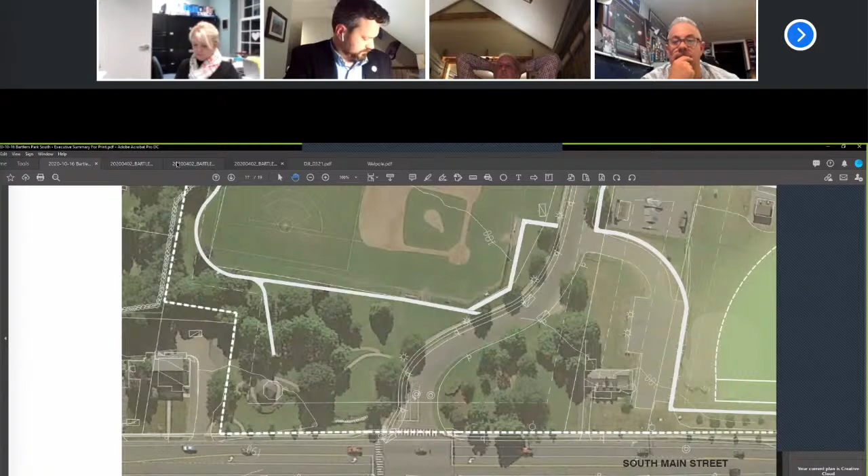Now, if there was an appetite for concept 2, some of the things that potentially can be phased are: if you put the town green up front, you don't necessarily have to put in this roadway infrastructure, although it would be ideal if you're doing this earthwork and movement while you have the machinery out there. The mobilization cost would be beneficial to do that. You don't have to do parking. You essentially don't have to do this whole area here.

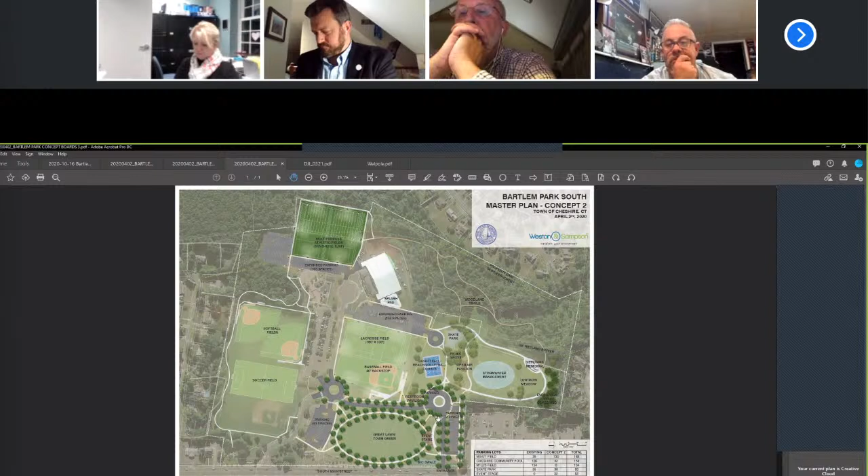You would want to do a displacement of softball, so you'd want to do at least one of the fields, and then you can leave this field alone. You don't have to do the turf. You could really only do the town green and some circulation paths as well. It's a possibility, but it does require reconstruction of a softball field.

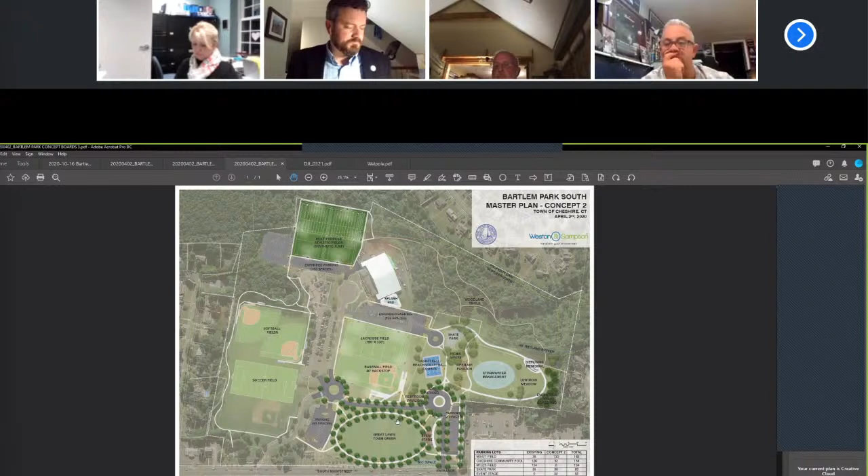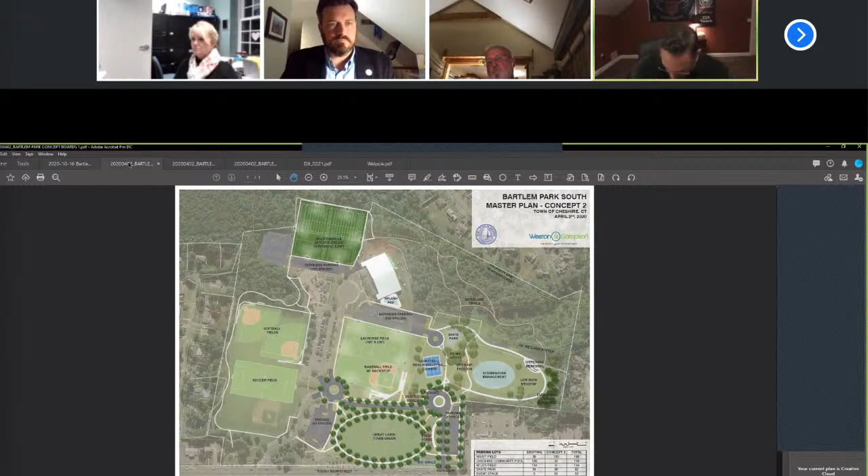So Ryan, to follow up with Mr. Slocum's questions, I think we could do a better job before this goes public of delineating the phasing that's possible in both proposals. We didn't do it at all in this presentation for proposal number 2, and you've just admitted that you can do that, particularly to include the turf field. And I think your phasing maps that go along with the budgets for phase 1A and B are confusing to me. If you look at concept 1B, if you look at your red outlines, you show the red outlines around the new turf field in the center of the facility, but yet that's not included in the $6 million budget.

It's included in the next budget, which gets you to 14.8 million. So I just think Mr. Slocum raised a very relevant point. We need to be very clear to the community of what we're proposing and how we're proposing it. And I think that this thing absolutely has to be able to be done in phases. I don't believe there's going to be an appetite, I could be wrong, for a one-phase $14 million project. So it seems to me that this is going to have to happen over a number of years and be building towards the inevitable final product. So I think we can do a better job making sure this gets cleaned up to be very clear to the public of what we're proposing.

Sure. Are there any other questions from members of the council? I can't see everybody, so please just jump in. Rob? Mr. Chairman? Ms. Nichols, yeah. Go ahead, yep, go ahead, Sylvia.

No, I concur. That was my question, we need to be absolutely clear what's included in each of the proposals. It's like a Chinese menu — can we take one from column A and one from column B? We need to be prepared to talk about the costs. And I agree with you, I doubt there will be an appetite to do the entire thing all at once. So it's really important to make it clear, having been involved in some of these projects over a lot of years. I think this proposal was very good, but you're right, it was confusing as to what exactly was included in the variations. So I would support that request to clean that up and make it easier for the public to understand.

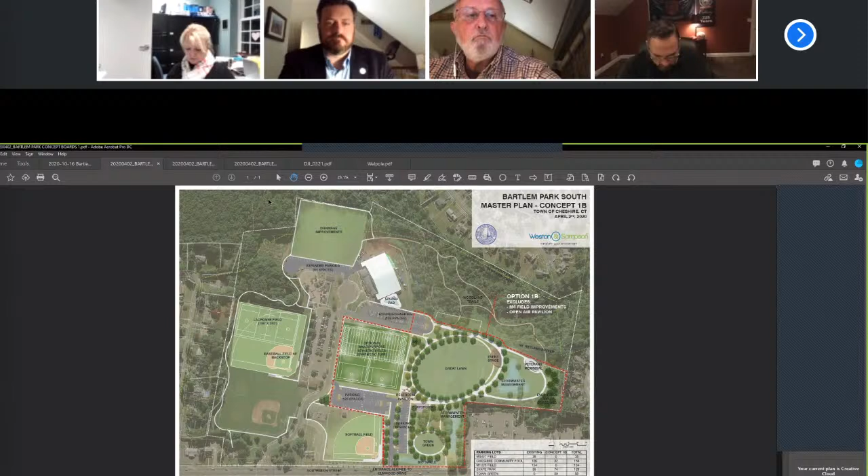Question, and I agree as well. I think that's important because Tim brings up a very good point. Once these go public and people are saying, 'Oh my God, this is going to be a $15 million project,' and they're not, or this is going to be $6 million, it needs to be very clear as to what those projects, what those concepts contemplate. Because even option 1A, if you just look at 1A, people are seeing some of the other options. They're going to say, well how come that's only 2.3 million and everything else is 6 million or 14 million? So it needs to be very clear.

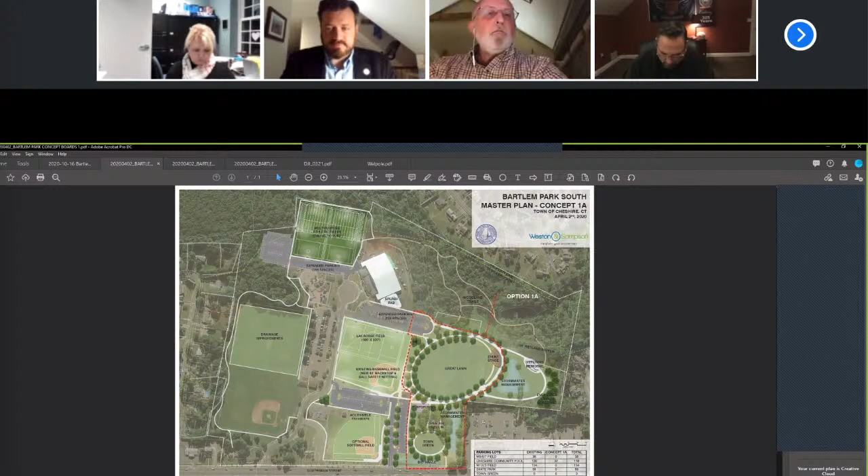But going back to just a couple things on the map, one of the things Peter had mentioned earlier on option 1A was the bioswale. Could you, I see that down there by the town green right along Route 10, and what exactly is a bioswale, and what's the importance of that? I know it caught my attention because Peter mentioned the idea of being able to see the town green from the road, and even if you get rid of those trees, does that bioswale interfere with that somehow? So what I assume it's obviously just a catch basin, but I was curious if you could explain what the bioswale is supposed to do down there.

The bioswale right now is a low point along Route 10, and it almost currently functions as a bioswale. It's just a water catchment area for filtration. So is it like a rain garden? I mean, is it contemplated like a rain garden? Yeah, similar to a rain garden. Which is dry 90% of the time. Right, okay, that makes sense.

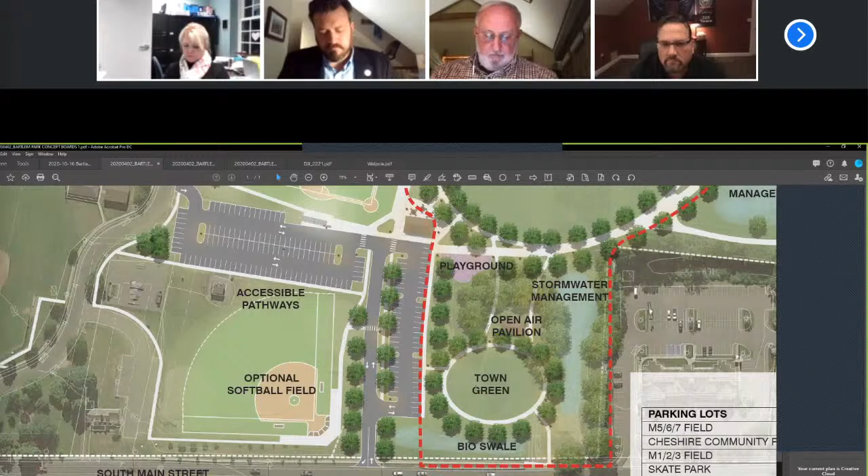And then my other question goes to, in all the concepts on these plans, we talk about there's a veterans memorial back there on the south edge of the corner. Could you just talk a little bit about that? I mean, obviously that's something I think is important, but I just want to make sure where it came from. Is it there because it's a nice quiet place to put it? I just want to learn a little bit more about the concept of having a veterans memorial there. I think it's a great idea. I don't know if it showed up on your planning and your wish list, but I think it's a great idea. I'm just curious a little bit more about it and where you came up with the idea for the location there.

Early on in the process, Leslie Marinero and the rest of the Veterans Council reached out with their desire that we find a permanent home for a new Veterans Memorial in town, one that has an area for more contemplation and the ability to do that which the other locations in town don't quite afford to the same level. They were looking for an area that you could go a little farther off of Route 10. Again, this isn't indicative of exactly the size, what it would look like, or the design, but we were trying to be responsive to their request. Cheshire has a very proud history, Medal of Honor recipients and veterans, and honoring our veterans locally. I think that was something we were trying to be sensitive to and find a spot for. It looked like there was a natural spot in all of the plans, frankly, to have one.

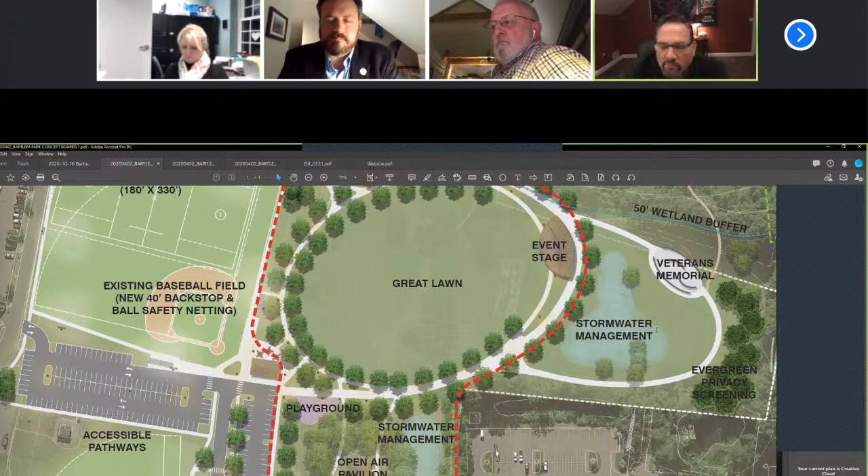As we mentioned in the beginning, folks, this is really just the beginning. I'm really looking forward, as I'm sure the rest of you are, to get some public input and comment on what we're seeing. So this is really just the start. I know we all have a lot of thoughts and questions, and we're going to have a lot more before this thing comes to fruition. But I'm really anxious to hear what the public will say about these designs, once they've already given us kind of the litany of things that they would like to see.

I think the professionals did a great job of including a lot of what was mentioned. I think we all really like the green areas that were created on what is currently a very beautiful Chapman property. Many of us thought we really don't want to decimate that in any material way. We want to accentuate and take advantage of the beauty of that parcel. I think we all see it as it sits today with the meandering trail that Park or Public Works put in there. It's really beautiful property. And I think this design, both of these, really take advantage of that and accentuate that. So I really commend you guys for working hard on it.

Looking forward to the next phase of this thing with more public input, and we've got a long way to go. I know it's much more difficult because of COVID, folks, and I think we all apologize to the public. We wish we could have moved this along a little quicker. But nonetheless, COVID hit and it really put a slow start to a lot of this. So that's the reality of where we are today. But it looks great, and thank you to everybody who participated.